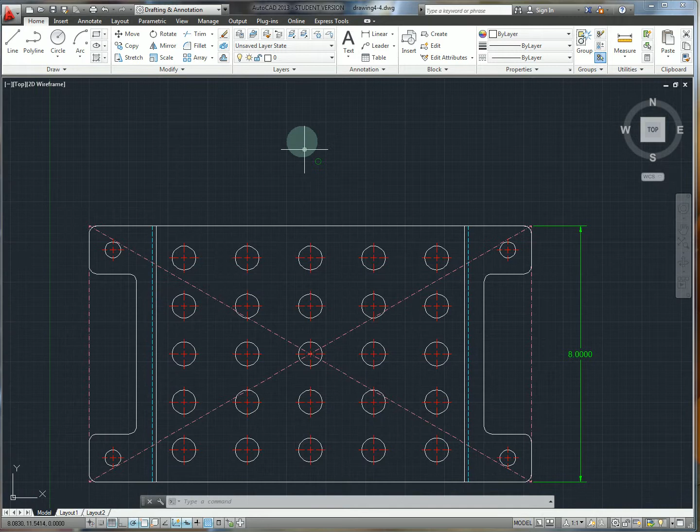So I've jumped ahead slightly. We're going to move from the bottom view here up to what would effectively be the front view. And so I just unlocked my reference layer so that I can add a new outline. So I'm going to use the rectang command and OSnap and polar tracking.

I'm going to bring myself up about, let's say, 2 inches up, and then I'm going to specify 14 by 3 as my rectangle size. So I want to put this new rectangle on my reference layer, and then I'm going to lock the reference layer down so that I can't select or effectively I can't change anything on the reference layer.

Okay, so now I'm back in my basic layer. I'm going to start drawing the outline here. So we know this is 1/8 of an inch thick. We know the inner dimension is 0.25 and the outer radius here is 0.375. So what I'm going to do actually is sketch the top profile first, and then we'll use the offset tool to get the inside for free.

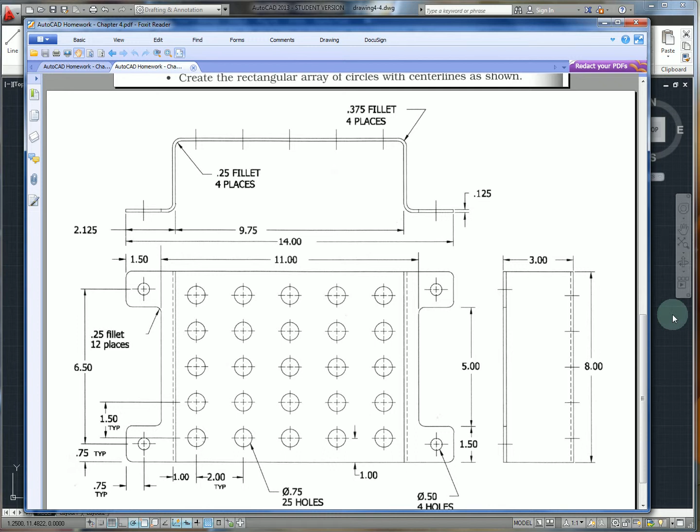So to do the top, I'm going to use polar tracking, go up 1/8 over, and here I don't have to do any calculating because I know that I can offset directly from that hidden line. I'm going to go straight up to the top, and that's it.

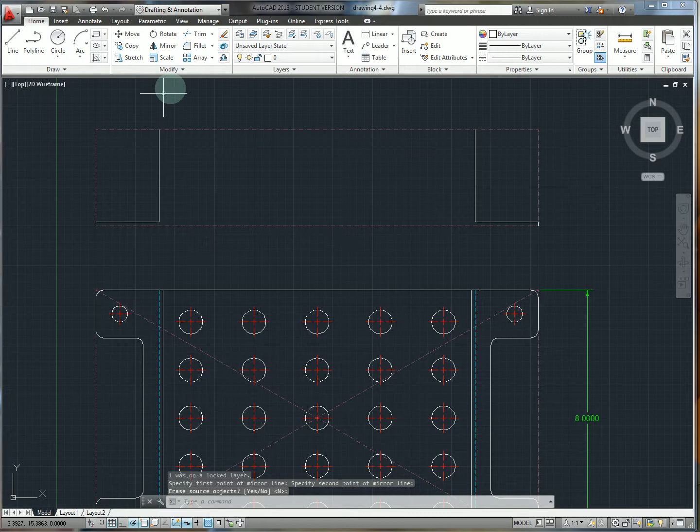Then I'm going to select this geometry, mirror, select the midpoint, don't erase it, and then I'm going to connect the top like so. So again, with this workflow, we have no duplicate shapes, and we have a nice outer profile. The final step before we do our offset is filleting. We're going to change the radius to 0.25, fillet our inside edges.

And I could have done the filleting before the mirroring, but for just 2, it doesn't really save that much time. And then I'm going to do fillet again, change the radius to 0.375 or 3/8. Hit M for multiple, and then do the tops. So now I have my outer profile.

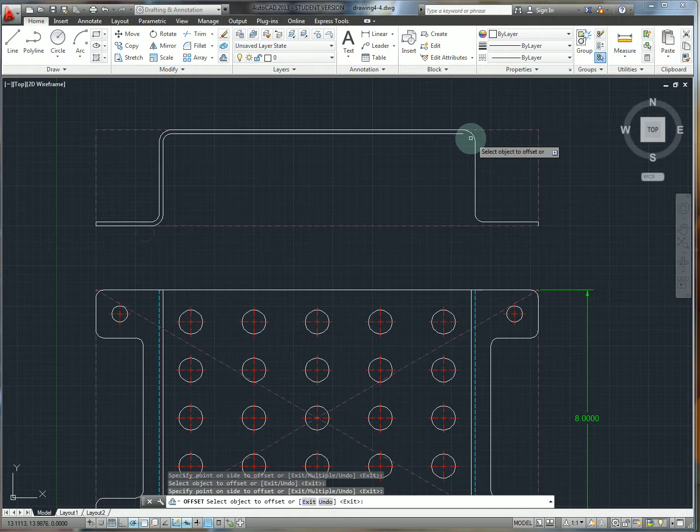I'm going to use the offset tool, specify my offset distance, 0.125 as the thickness, and then I'm going to start clicking objects that I want to offset. So very quickly and easily, I can select these individual lines and create the inner profile. And you'll notice that I get a consistent thickness all the way through.

And these here, if I switch to center mark layer and add a center mark for this guy, and then another one for that guy, we'll notice that they nicely overlap. So that's going to be a nice little feature.

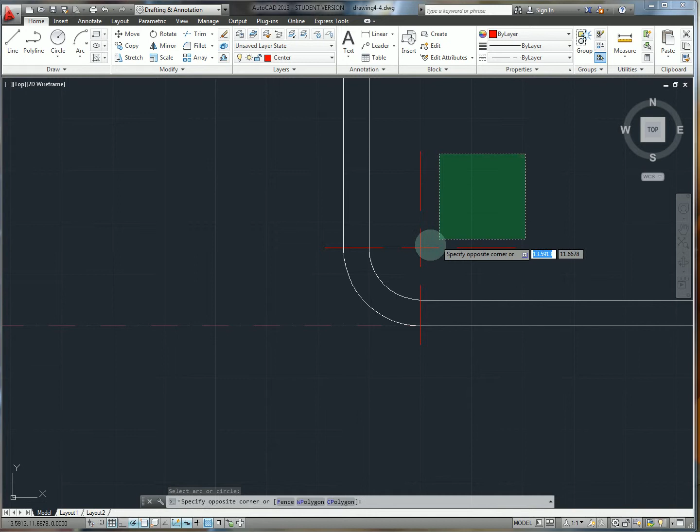The final step on this view here is just going to be to add in our center lines that correspond to each of these holes. And that's going to include also the hidden lines for each of the holes as well. So we're going to do a line here, and then here I can use OSnap polar tracking to just draw a center line like so.

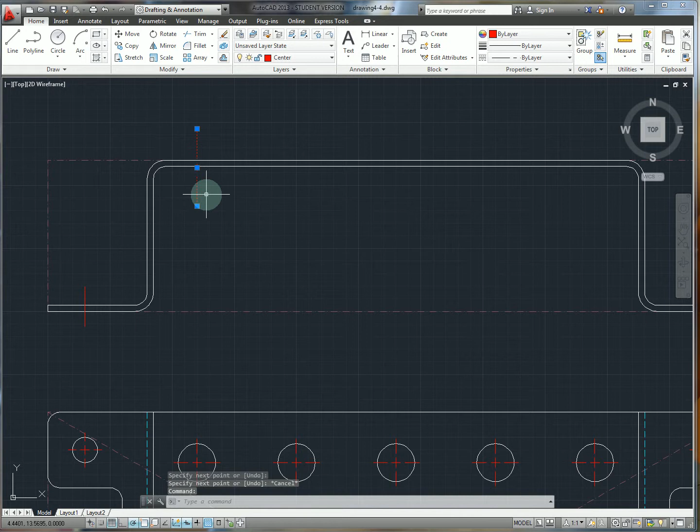I can do the same thing on this side, track my way up, draw a center line through, and at this point I'm not really too worried about height because I can trim that away later. And then I'm going to select and array this guy, do a rectangular array of, let's say, 5 elements, and then we'll change the spacing to 2. And so now we can match the spacing on the bottom.

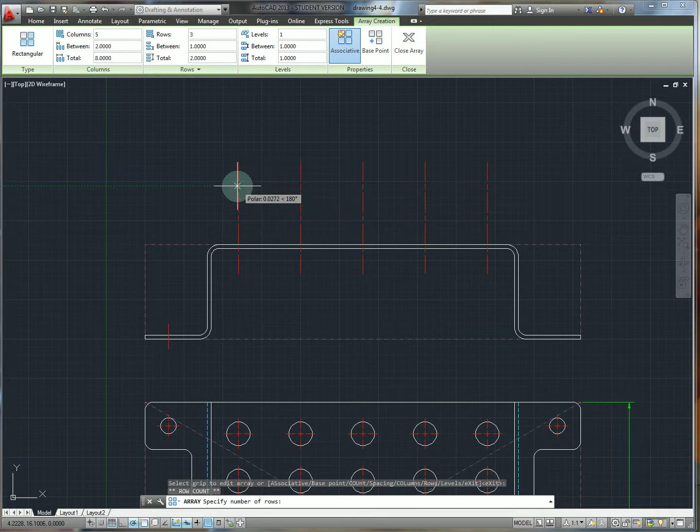And then here, we want to make sure we make this just one row so that we don't have any vertical lines as well. Then at this point we can mirror this guy if we so choose, or just draw another one on the other side. And now we have center lines, the beginnings of the holes, the sort of marking it. And so now we can switch to hidden and do offset.

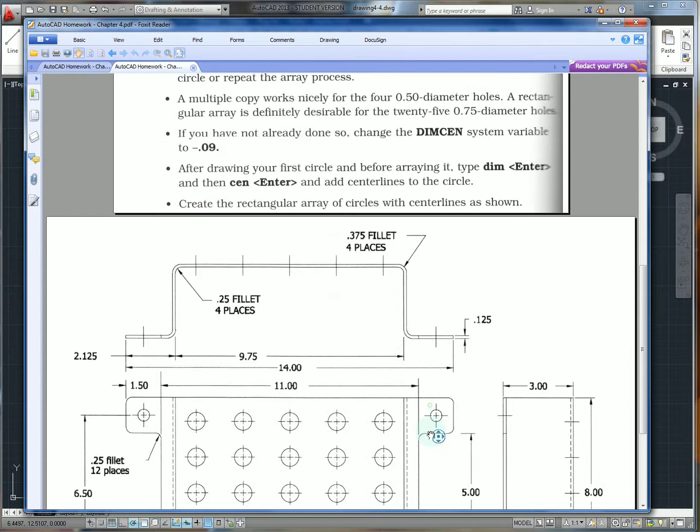And in this case, we know the diameter of the holes, so we can use the offset tool to actually make offsets from each line to get a cutout for each of the holes. So we'll see that the diameter of these holes is 0.5, so the radius is going to be 0.25. These center holes, they're 0.75, which gives us a 0.375 radius.

So again, we'll do offset, specify 0.25, object like so. The same thing here. And then, because unfortunately this offsets directly to the same layer, we have to manually change that. And then at this point we would do, say, the trim tool, use these edges, trim away the excess.

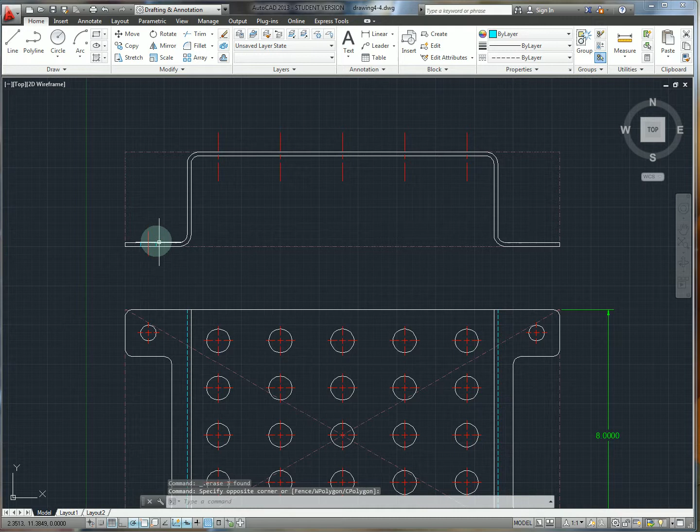Now I can see that it sometimes can pay off to do the mirroring after the fact because we can save some operations. So now, for example, I'll correct using a little cheat with my stretch tool. I'm just going to line these up to be a 1/4 of an inch out. And now I can just mirror this, again using my convenient reference geometry, and we have a hidden line.

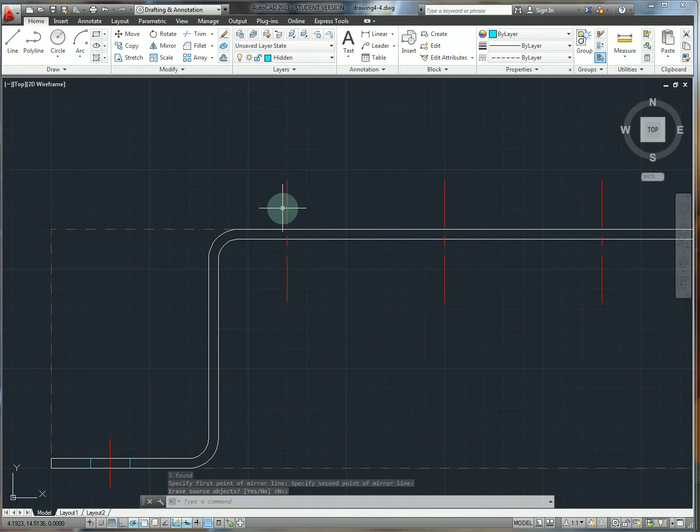Okay, so next up we're going to do the centerpiece. Alright, so since we've already made this pattern, our temptation might be to delete it and start over, but there's an easier way. If we click on the pattern, we get this special array ribbon, and one of the things we can do is edit the source.

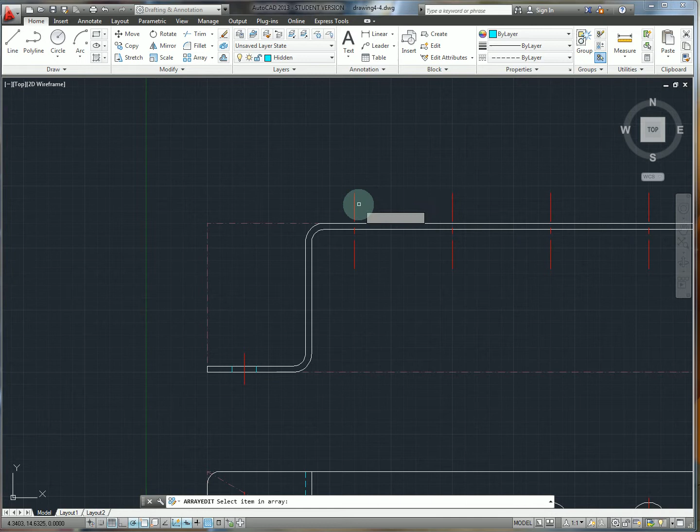So if we choose our base item, you see that it grays out the rest of the items, and now at this point any changes that we make here will be propagated through the rest of the pattern. So for example, if I'm going to do an offset of 0.375 to draw my hole edges, when it's done we can see that these new lines are propagated through. So hey, that's good.

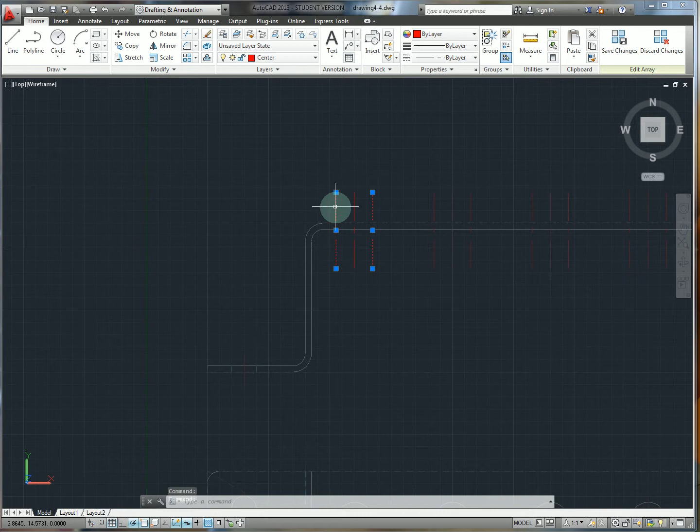So I'm just going to go through the same procedure as before. We're going to change the layer here, and then we can use our trim command, select the tops and bottoms, get rid of this excess, and then here I'll even use the stretch command twice to line these guys up.

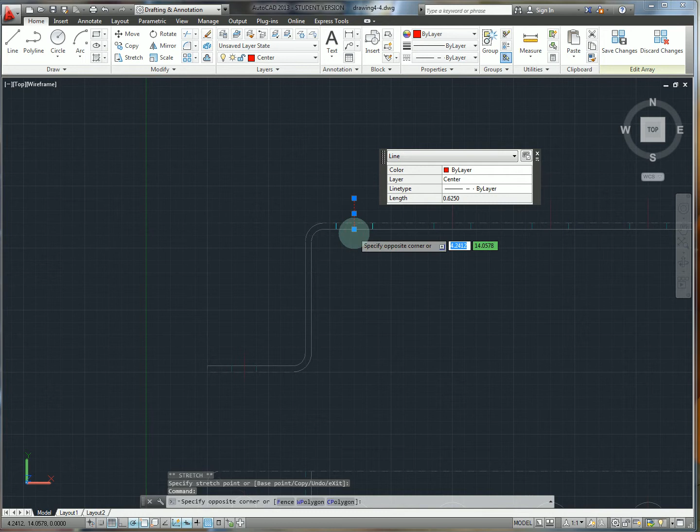So this is not exactly the orthodox way of doing it, but it's kind of a quick and dirty way of correcting these. And now we can see that all of the patterned holes here have the same features. We can see that's been propagated through. So if we're ignoring dimensions for now, that's basically everything you need to represent this.